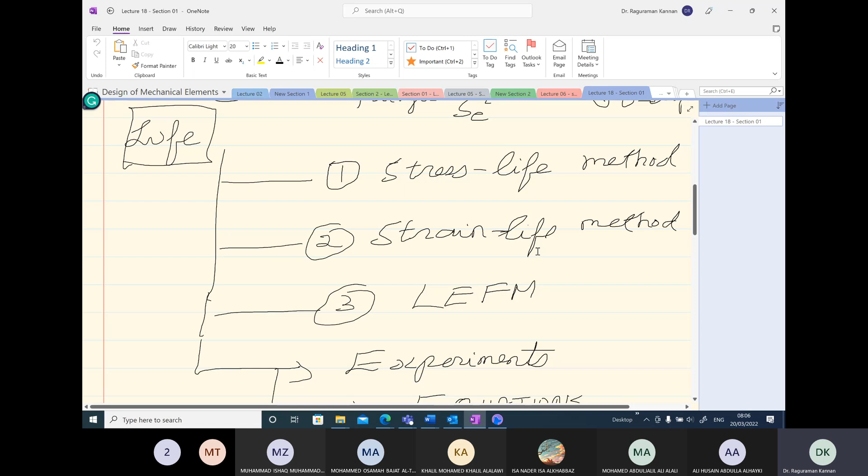So let's see here. We had 3 types of methods: stress life method, strain life method, and linear elastic fracture mechanics to predict the life of the part. We went through the experiments conducted for stress life method and strain life method, and we also saw equations, the empirical relationship between total strain, plastic strain, and elastic strain versus the number of cycles to failure. This was an empirical relationship obtained from experimental results. Now we will go through linear elastic fracture mechanics.

So this is lecture 19. And let's type it in here.

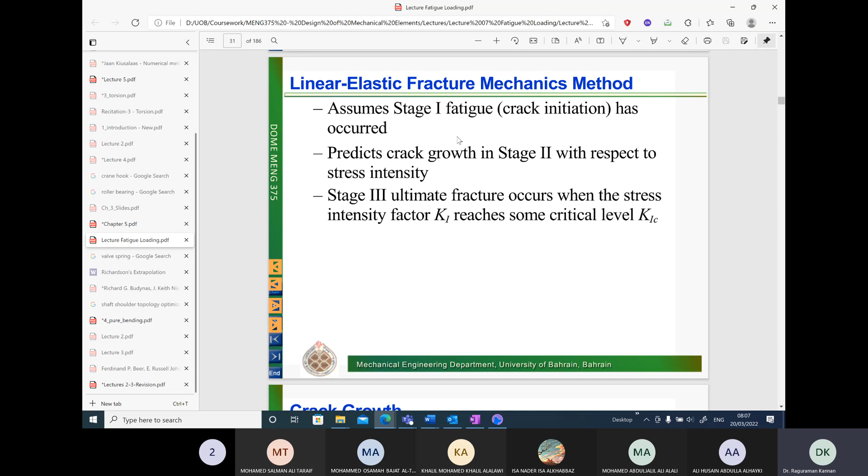So what are the equations we are going to use in linear elastic fracture mechanics for dynamic load? Again, we will use the same equation: Ki is equal to beta sigma root pi a. We are going to find the same stress intensity factor, but based on the maximum nominal stress and the minimum nominal stress, we get two Ki values, and then we take the difference between them. Just like we had the definition of sigma amplitude, we are going to calculate delta Ki in this case.

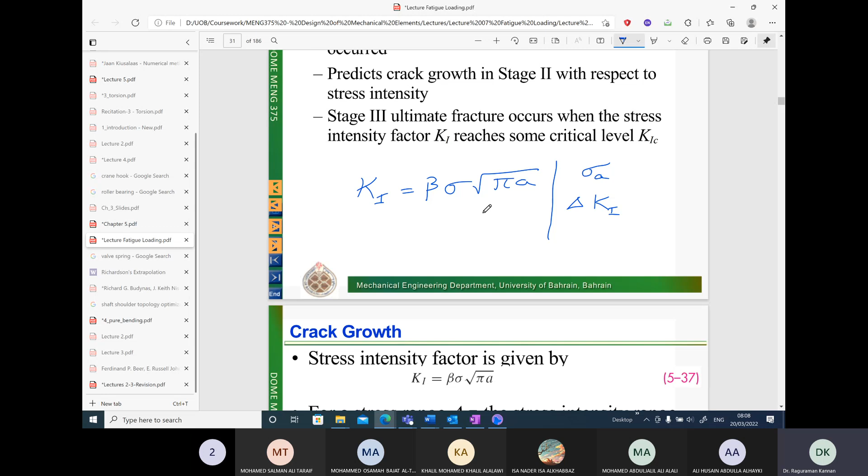Delta Ki will be the difference between the Ki values depending upon the sigma A value. So we assume stage 1 fatigue has occurred in linear elastic fracture mechanics, and this predicts crack growth in stage 2 with respect to stress intensity. In stage 2, the life of the specimen is found out. As long as stage 2 persists, life is there, and when it reaches stage 3, we have the ultimate fracture, brittle fracture to be more accurate, which is catastrophic. When Ki reaches KIC value, brittle fracture takes place. In the same way, we have to get a relationship.

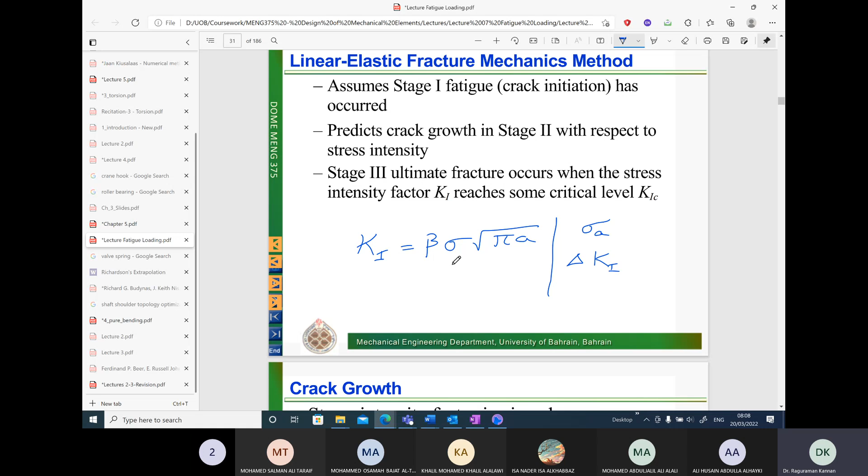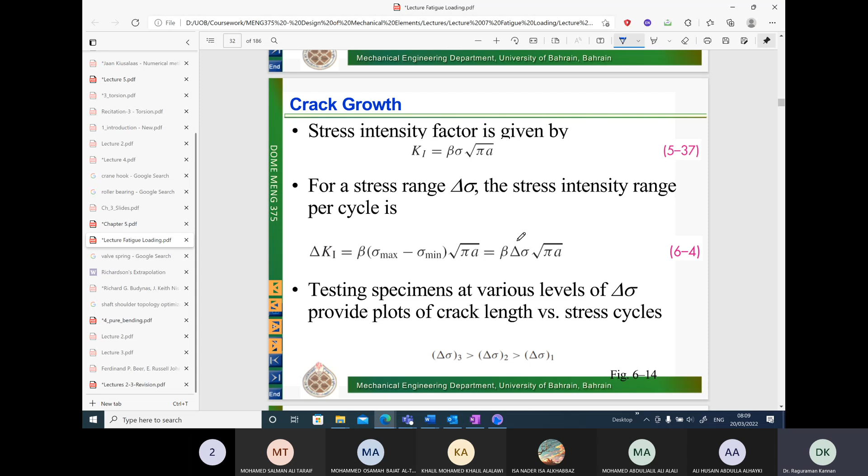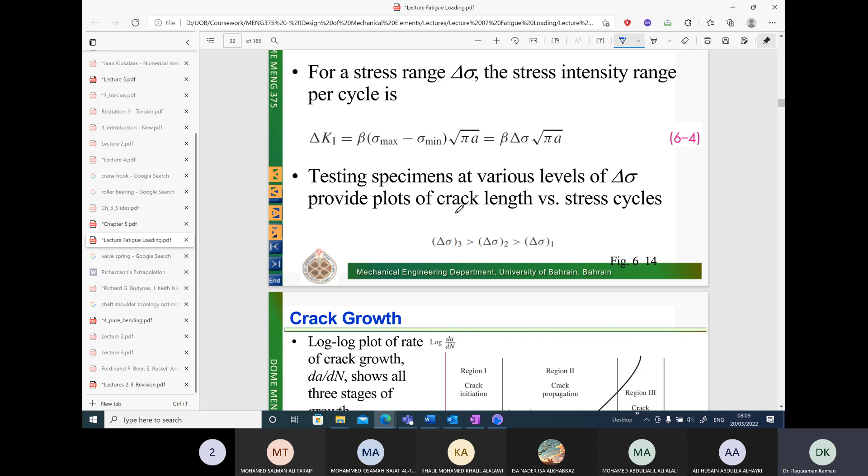So let's see the equations. The stress intensity factor is defined in this way. Using the sigma max and sigma minimum values, we obtain delta Ki. Testing specimens at various levels of delta sigma provides plots of crack length versus stress cycles. So what kind of experiment do we do? We again do experiments with a lot of specimens for various values of delta sigma. We calculate and perform the experiments, then obtain the data, providing a crack length versus stress cycles plot. Once we have this plot, this is a different plot again.

So we have this plot for various delta sigma values. Maybe on the y-axis we have crack length versus delta sigma.

From the log-log plot of rate of crack growth, dA over dN shows all three stages of growth. From this plot provided here, we will be able to extract more data.

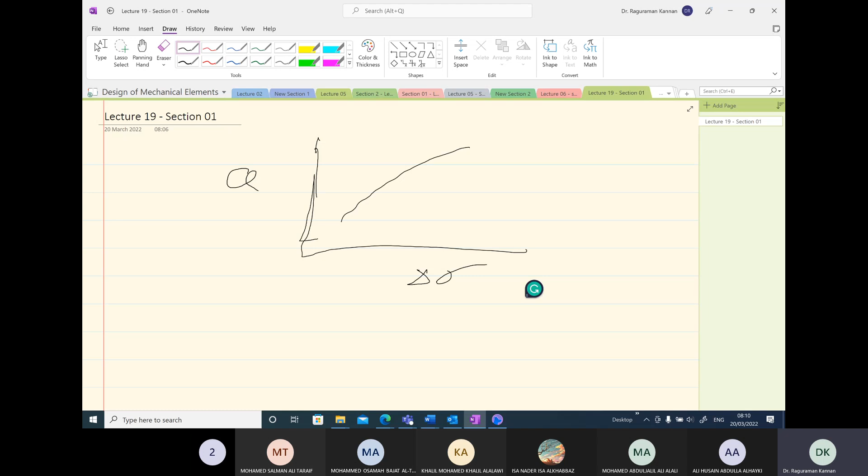So let's assume we have a curve like this, and in this plot we can, okay, let's see here, we have several plots. Maybe we will be able to obtain...

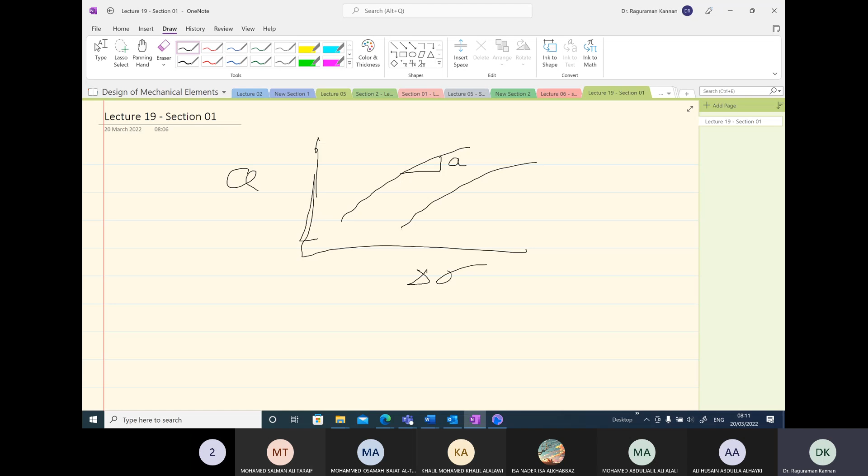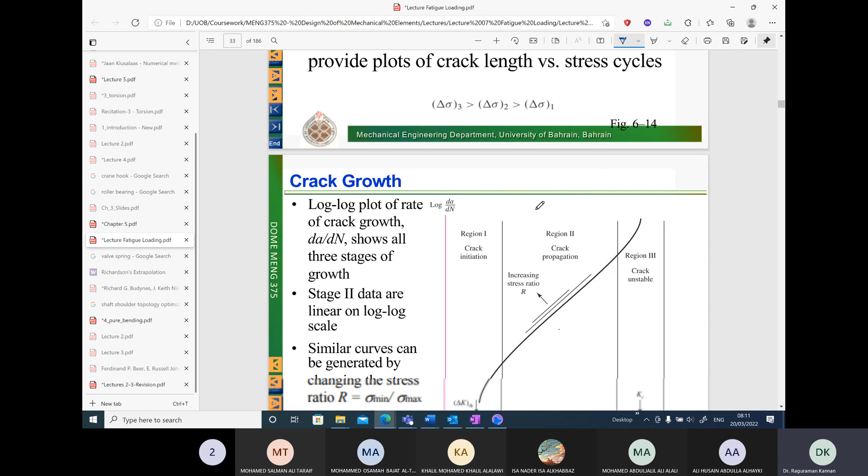What is the change in crack length for each delta sigma value. For each delta sigma value, we can obtain the change in crack length and how many cycles it took for failure. So finally, from this plot, we will be able to extract data between log delta K and log dA over dN. Somehow they extract this data and finally plot it here.

Now on the y-axis is the rate of growth of crack length with the number of cycles. On the x-axis, you have the delta K value, which is this particular value. Now what you observe here is there are three stages in which the crack grows.

Initially, the rate of growth of the crack is very high at region 1, and then it flattens out, becoming a constant rate of crack growth in stage 2, and finally we have again an exponential increase in the crack growth and then fracture. So the life of the specimen is decided between this range.

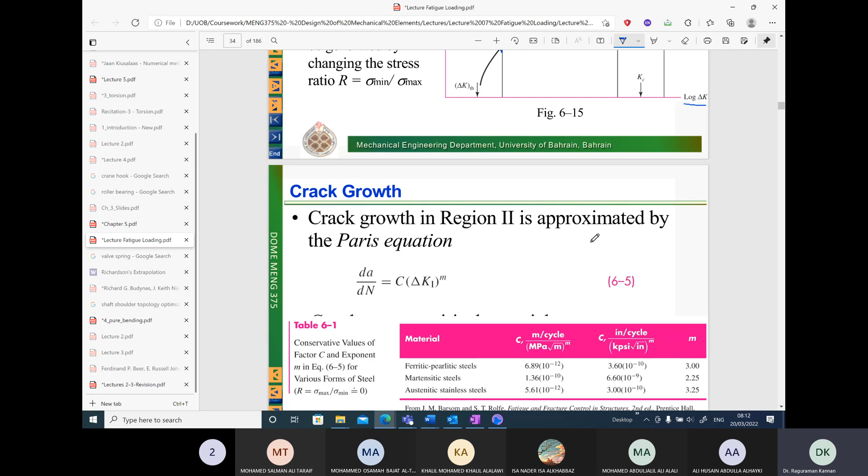Now based upon this graph, since this is a constant slope line, we can obtain an empirical relationship between dA over dN and delta K. Based upon the log plots, we get two constants: one is the exponent, one is the constant value, connecting the rate of growth of crack length to the delta K values. This gives you an equation called the Paris equation.

So finally, you will be using this particular equation for solving problems. How do I find the number of cycles to failure, or the life of the specimen, from this equation? By rewriting the equation and then integrating it.

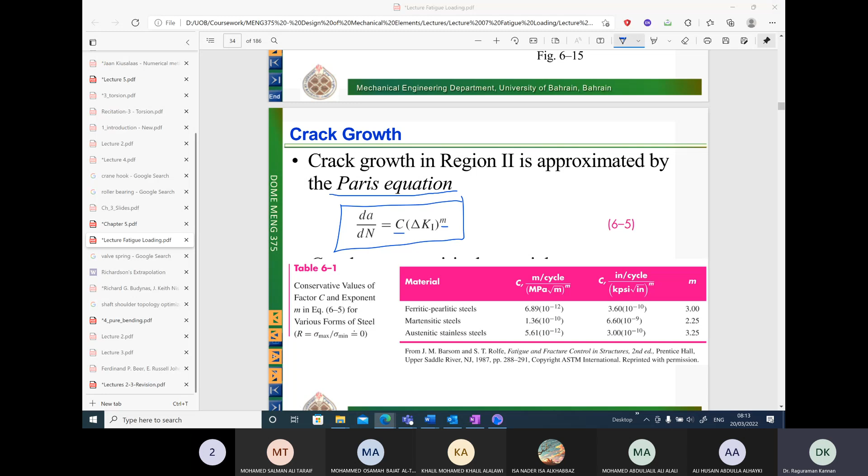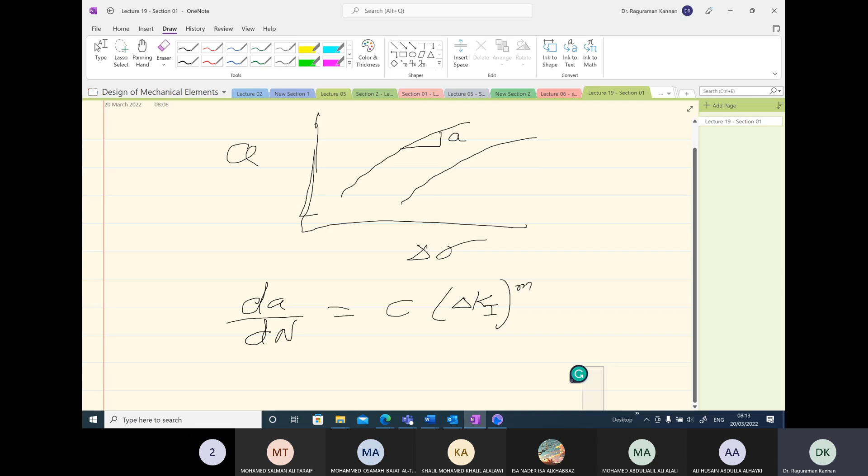So we can rewrite dA over dN as C times delta K to the power m. Take dN to one side and take all the other terms to the other side.

To the power m, and then integrating from 0 to the number of cycles to failure will give you the number of cycles to failure. Here will be the initial crack length, since we are integrating with respect to crack length, from initial crack length to final or critical crack length.

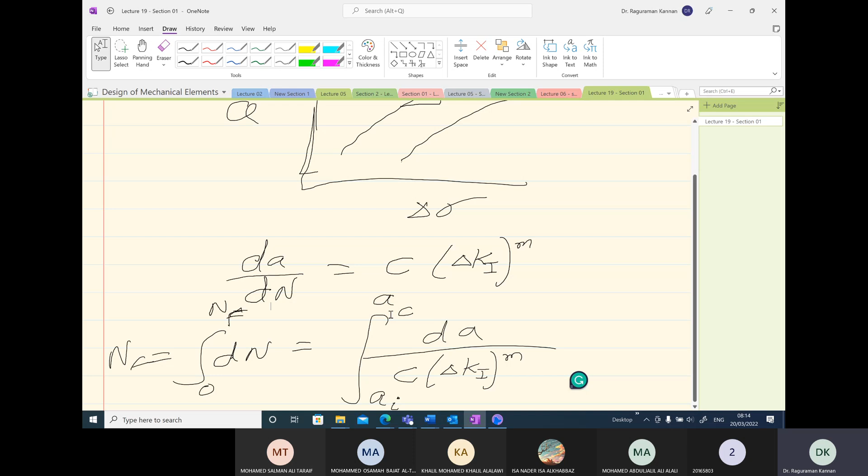If you know the critical crack length, then we can integrate up till the critical crack length, and the life of the specimen will be decided by that. Now the values of C and M are usually given in the problem.

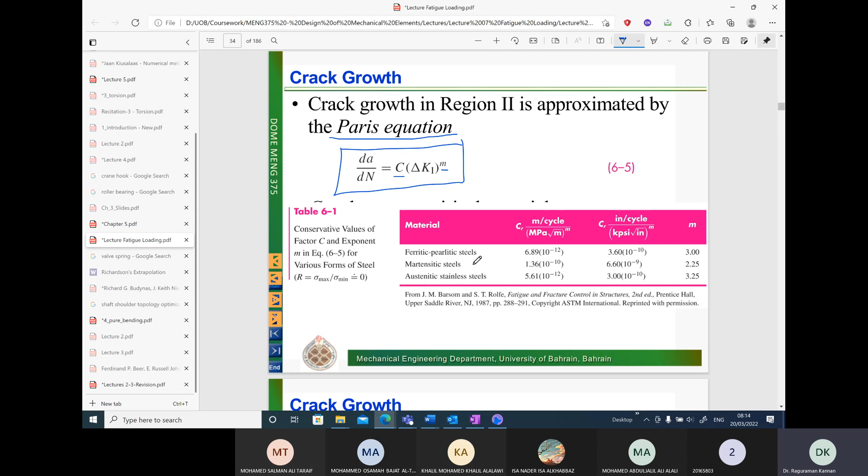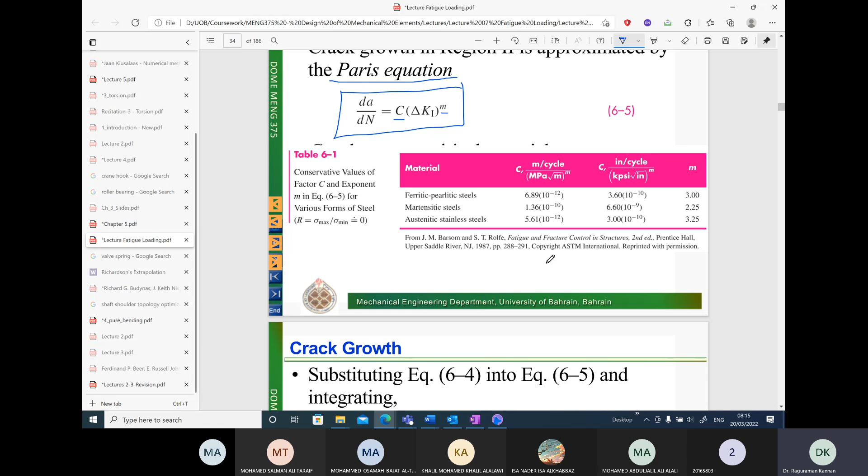C has these values for steels given here according to the empirical graph that was extracted, and M values are also given here, in both SI units and English units. So in your typical problem, these values will be given, and we will use this integral form of the equation to evaluate the number of cycles to failure.

Let's hold on a second until this opens so that we can calculate. We have 12 times 1200. We have a huge value. Let's see. So this is also in the denominator. Everything will go to the numerator, 8 times 12 times 1200.

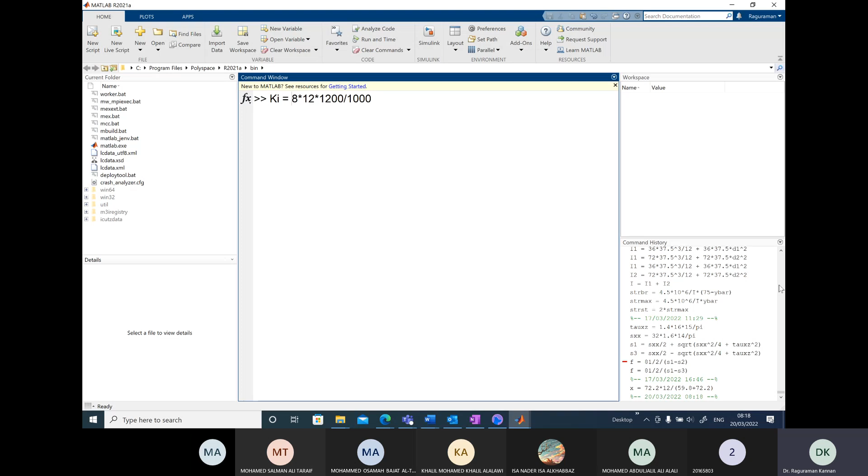Let's convert that into kpsi and therefore divide by 1000. Let's see, here we are calculating kpsi. Let's also see the properties are given in kpsi. Okay, so that's okay. The value 115.2 kpsi.

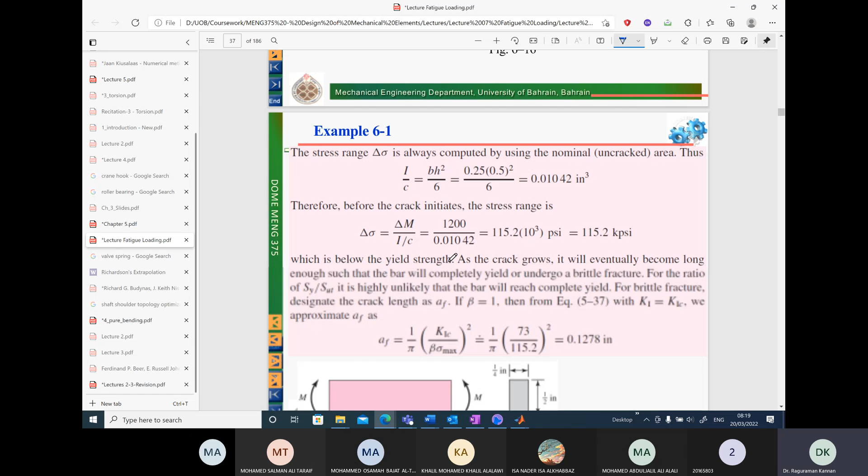Delta Ki is going to be beta. We will have delta sigma root pi. Okay, so let's just use the beta value they have used in the slide. Let's see here if they use a particular beta value. Initially, they are taking the beta value to be 1. And let's see here, we're using the KIC value. Okay, so before that.

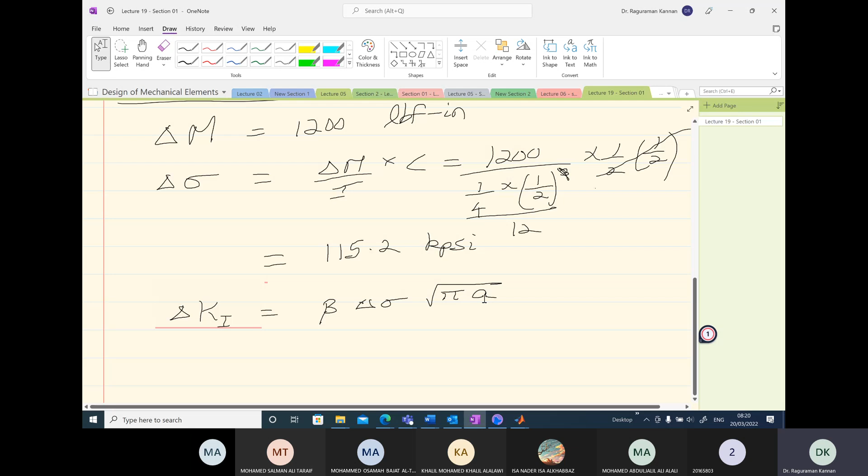So this is the delta Ki value we are supposed to calculate, but what is the A value to be used? So first, the question, if you read the question, let's go back to the question, what you are asked to calculate, estimate the number of cycles to failure, which means I need to use a particular formula for number of cycles to failure.

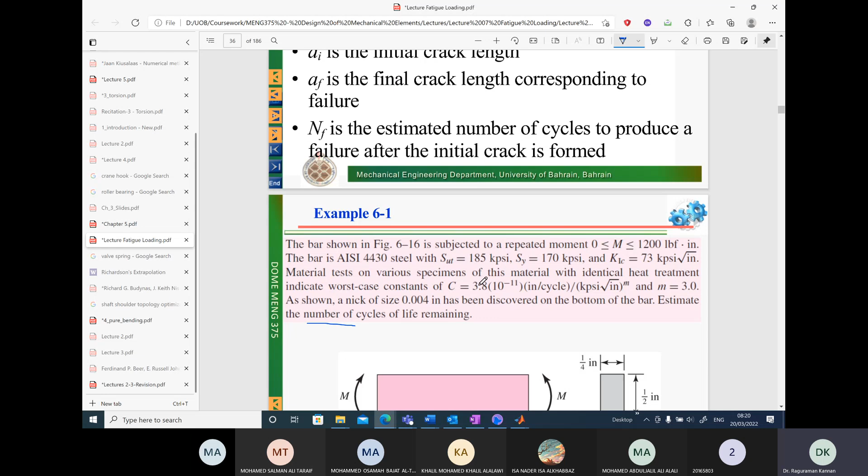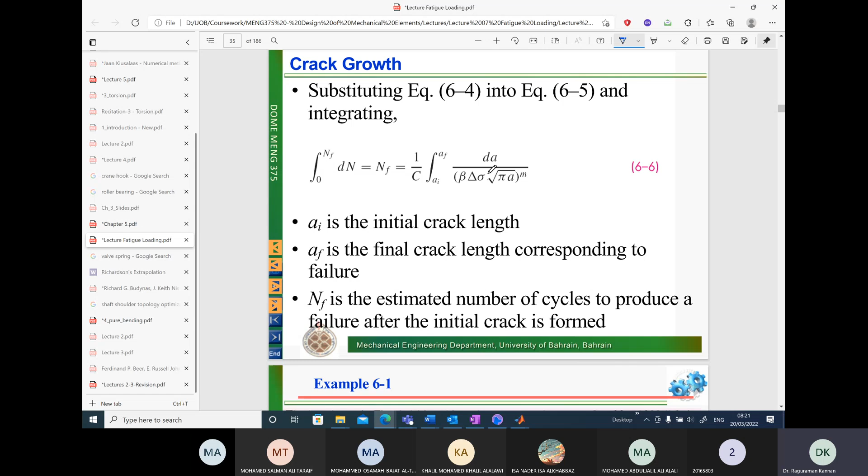A initial to A final, and then have the formula here. After substituting all the constants, we have 1 over C outside. Again, what they have done is they have substituted for delta Ki. 1 over C is a constant, so we can take it outside and rewrite the equation, dA over beta delta sigma root pi A raised to the power m.

Okay. We calculated delta sigma here. Now, if you see pi A, root pi A is inside the integral, and we are integrating with respect to A. So we need to find AI and AF. AI value is already given in the problem. The initial length is given to be 0.004 inches.

So I can put the value here, but we do not know what is the AF value, final crack length. So how do I find the critical crack length or the final crack length? We can say critical can be found when your Ki is equal to KIC value. Now recall that your maximum is also equal to 1200, so sigma max should also be equal to 115.2.

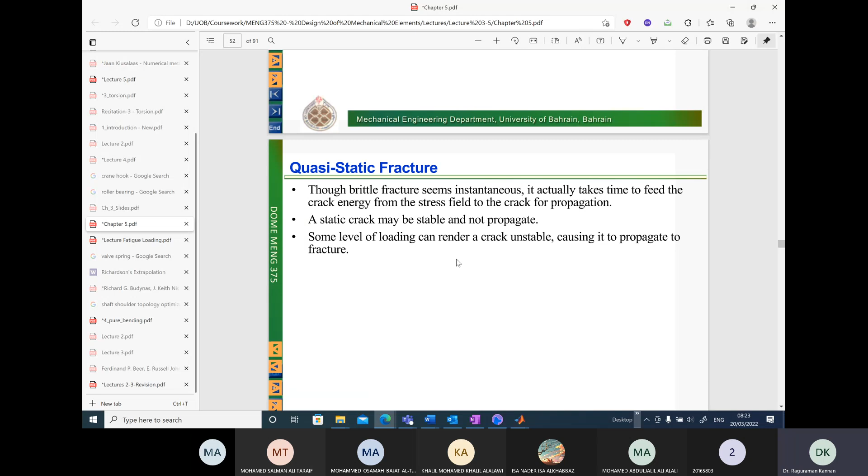So for this critical length, let's assume initially beta equal to 1, because we do not know what is the critical crack length, and we will not be able to figure out beta easily. Again, for beta, if you recall, we have to go to the previous chapter, and let's see here.

Assume beta equal to 1. Go here, Ki will be beta times sigma critical, 115.2, or the, so why did we assume sigma max is equal to sigma critical?

If you think about it, we want at the maximum stress, what would be the critical crack length? Okay, so that we can calculate this number of cycles to failure. The final crack length should also be equal to critical crack length. Up till critical crack length, we want to find number of cycles to failure. So at max stress, we most probably we want to calculate what is the critical length when it reaches that point.

Okay, so that at that point Ki with the sigma max value should be equal to KIC. So Ki is equal to, again recall, Ki is equal to beta times sigma root pi A. We are going to use the same formula here. Beta equal to 1, root pi times A critical should be equal to KIC value. What is the KIC value? It's given in the problem, 73 kpsi root inch, 73.

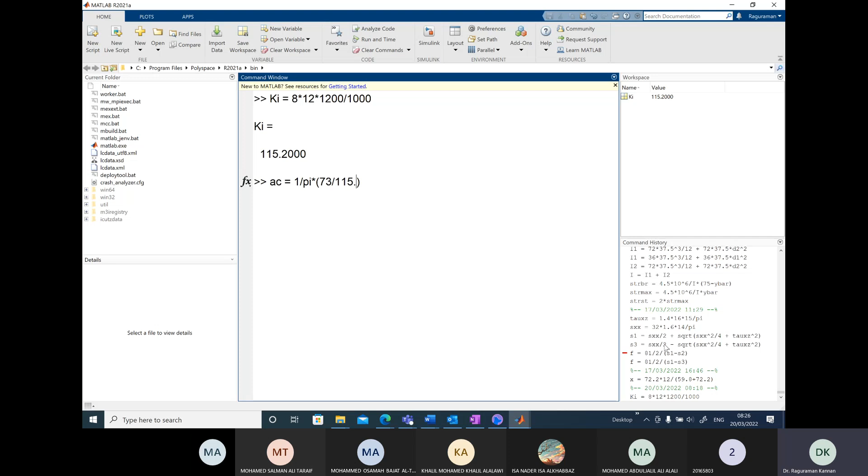So let's calculate 1 over pi times 73, 115.2, square this guy. Okay, so this is in kpsi, so everything works out. Let's see here. Okay, and we should get the result in inches. So AC is equal to 0.1278 inches.

So this is the point, up till this point we will integrate it and get the results here. Okay, so but before we do that, now we have a certain critical length, 0.1278 inches. Let's go back to the slides and see. Probably we can, for this critical length, extract the properties of beta. So for 0.1278, let's go back here.

We get the ratio first, A over B ratio. What is the B? B is the width. For our case, what is the width of the plate? 1/2 inch. By 0.5.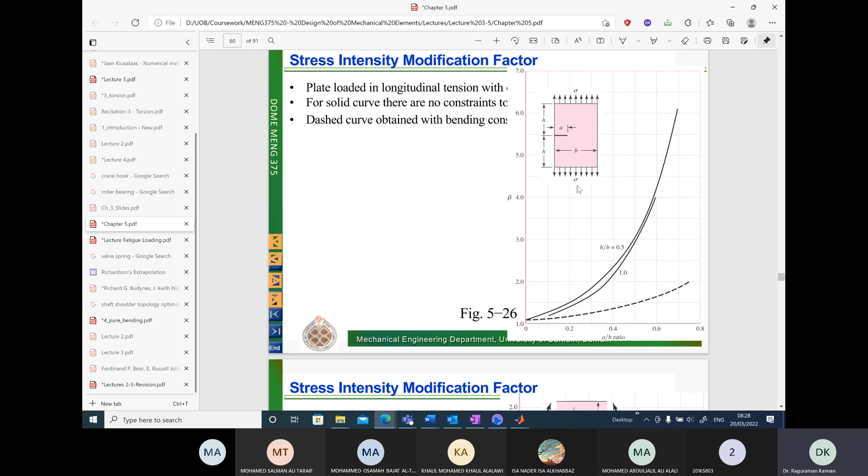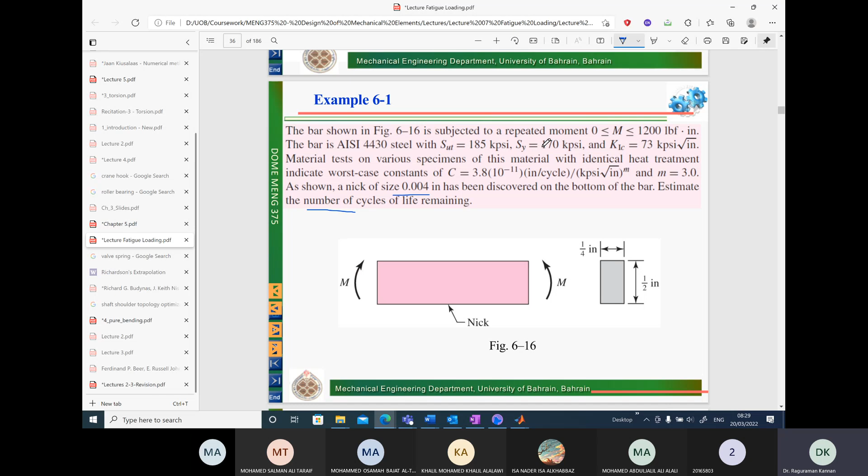We also need H over B, is half the length. Let's see here. We need the total length here, length of the specimen. Are we given any length? We are not given the length of the specimen. Let's see here.

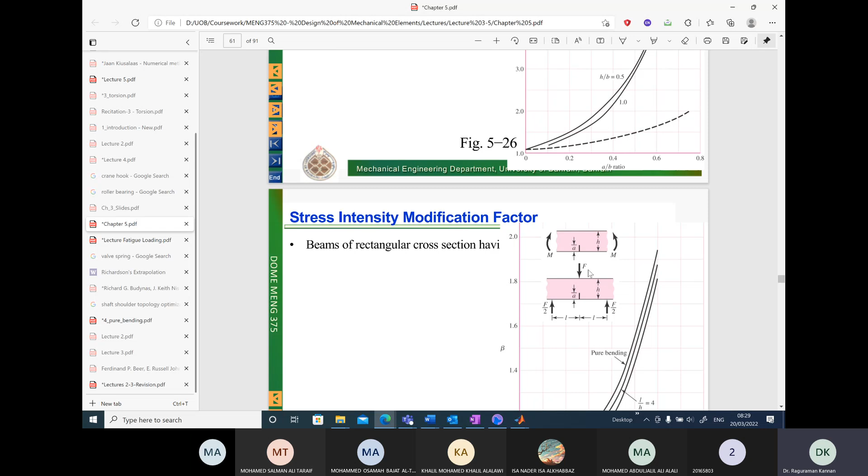And also this is a bending moment load. Are we in the right graph? No, we are not in this graph. This is the graph we have to use. Yes, so this is a pure bending moment load. This is the graph we should use, A over H, and pure bending.

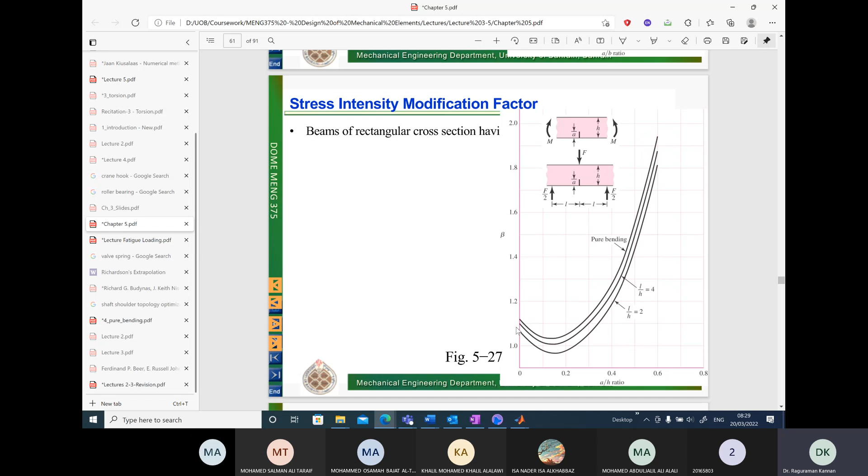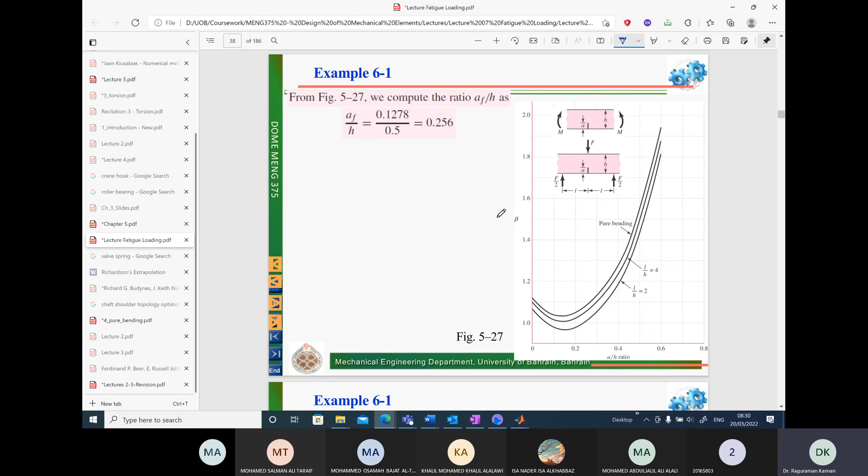This is the curve. So 0.2556 is halfway in between, and let's see, the value would be approximately here near 1.1. Let's see what they have assumed, a value of 1.1. That's what we get from the graph. 1.07. So they have assumed 1.07. We can assume the same value. Beta is equal to 1.07. And that's

based upon this value. Again, let's calculate the critical crack length using the same formula. So remember, there is a beta factor here which is equal to 1 initially. So this beta will be going inside here, this part over here. So we need to calculate the critical length again based upon this.

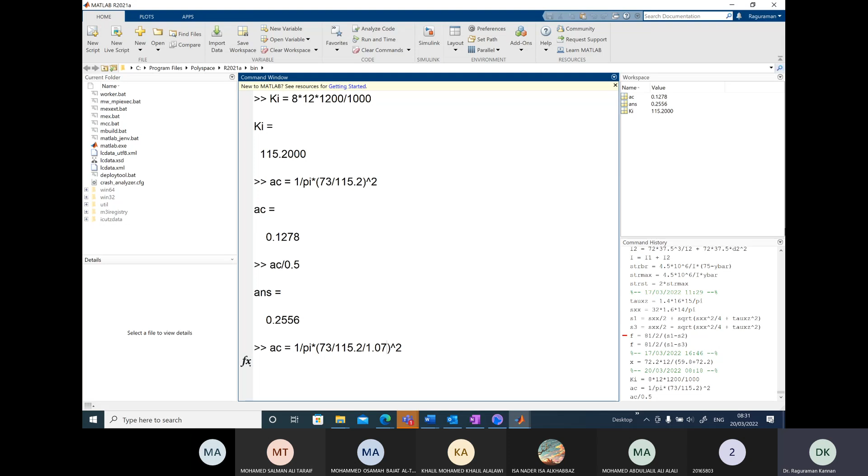Beta value 1 over pi, and 73 over beta 1.07, to 115.2. Okay, so what is the critical length now we get? Let's go here to MATLAB. Here we have to use 1.07 again. Okay. Get 0.1116. Critical length is

Okay, so this is the critical length I will be using again. Remember that I have calculated the critical length twice depending upon the beta values. Okay.

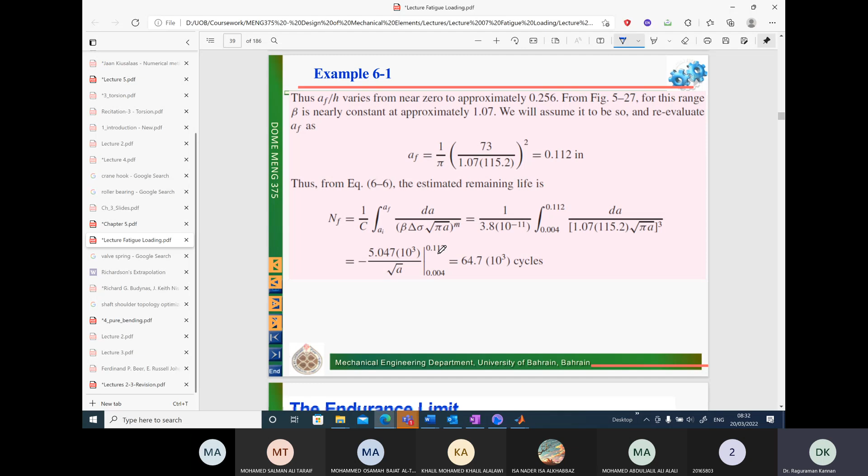Okay, so now let's use the integral. The integral is 1 over c. We need all the values. N f is equal to 1 over c. What is the c value? Go back to the problem. And here. The capital C value is 3.8 into 10 power minus 11.

The integral within the limits. The initial crack size is 0.004. And the AC is 0.1116. Use that value.

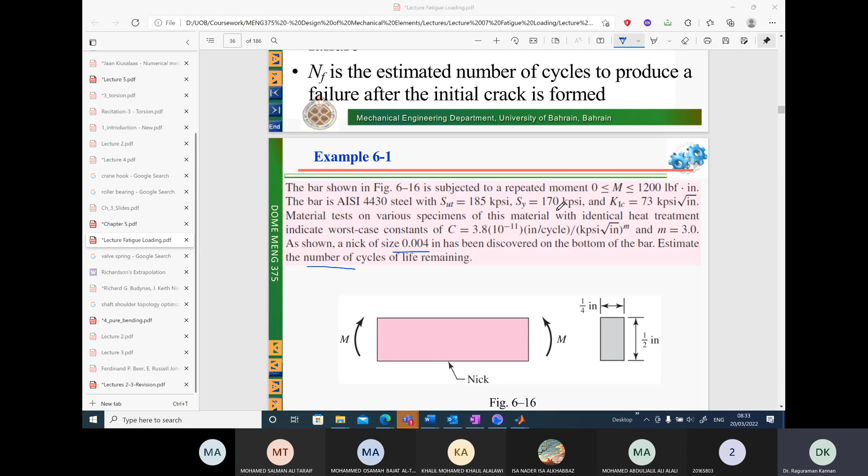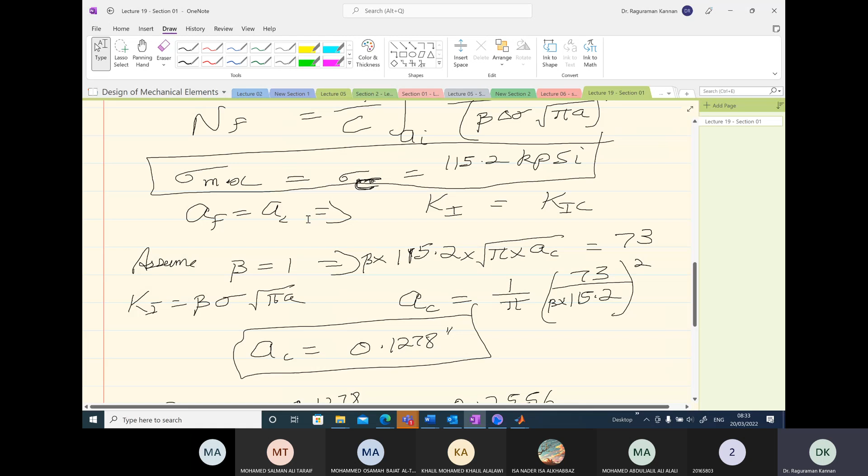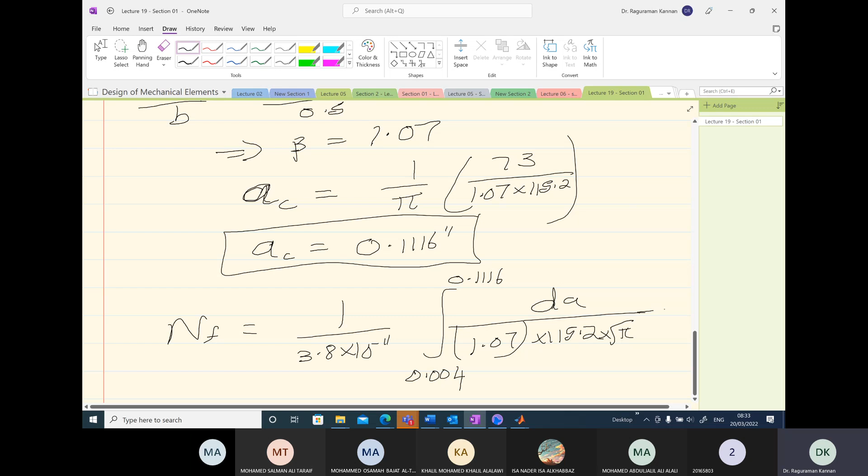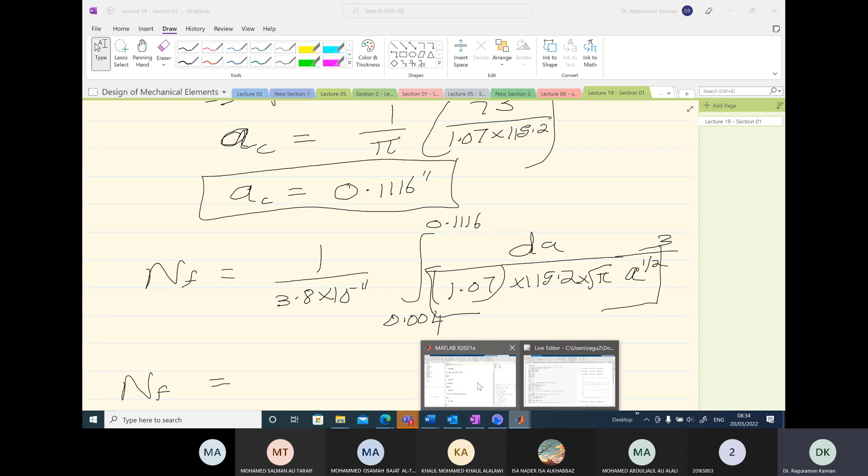Cube. Okay, so the cube value, and we can take all the constants outside and rewrite it. So let's simplify the constant part. Let's see. And this we're going to write as constant because I want to calculate this part, 1 by, so 10 power 11. We have 10 power minus 11. We can take it to the numerator. Divided by 3.8. Multiply that. And we have this quantity cube. So let's open this bracket and write it as cube.

1.07. Then 115.2. Multiply that by root pi. So pi raised to the power, we can write it as square root with a bracket. Anything else? No, that's it.

So these are the constants, and we have raised it to the power 3. And we get 2.5234. Multiplied by 10 power 3.

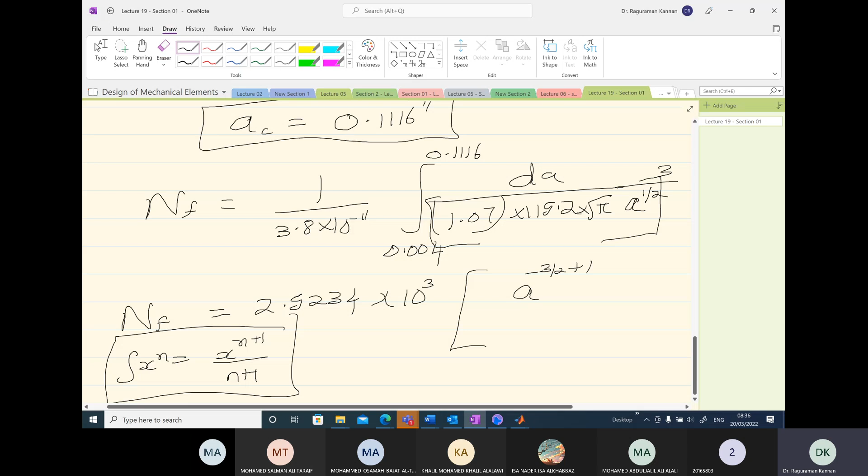Here inside the integral, we have a power 3 over 2 in the denominator. So if you integrate it, what is the integral x power n? X power n plus 1 over n plus 1. So this is the relationship we are going to use. A power minus 3 over 2. So integrate it, you will get a power minus 3 over 2 plus 1, in the denominator, minus 3 over 2 plus 1, within the limits 0.004, and then we have

0.1116. Okay. So what is the number of cycles to failure? Here we have minus 3 over 2 will give me, plus 1 will give me minus 1 over 2. And again we have a negative sign, minus 1 over 2.

Okay, I can use the negative sign and reverse the limits here. 0.004, reverse the limits. So in the denominator here, I have 1 minus 3 over 2 will give me minus 1 over 2, and the 2 will go to the denominator. Negative sign we have reversed already, so 2 times here.

What we will have here is a power of minus 1 over 2. In other words, we can simply write it as 2 over square root of a.

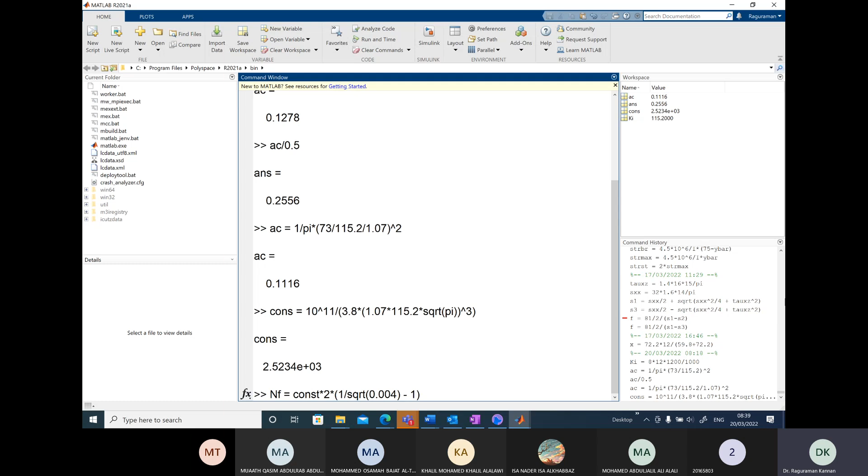So if you calculate f based upon the constant, multiplied by 2, multiplied by bracket open — 2 we can take it outside, 1 over root a, so 1 over 0.004 minus, it should be square root because it is root a, minus we have the critical length, 1 over square root of critical length, which is AC.

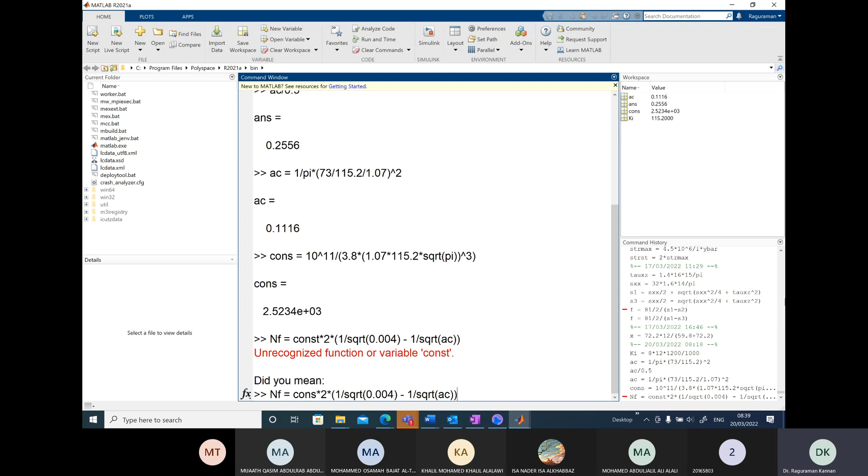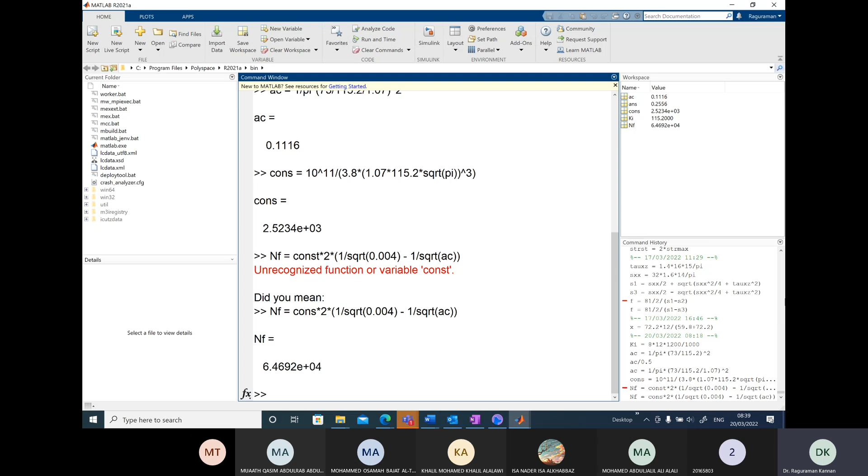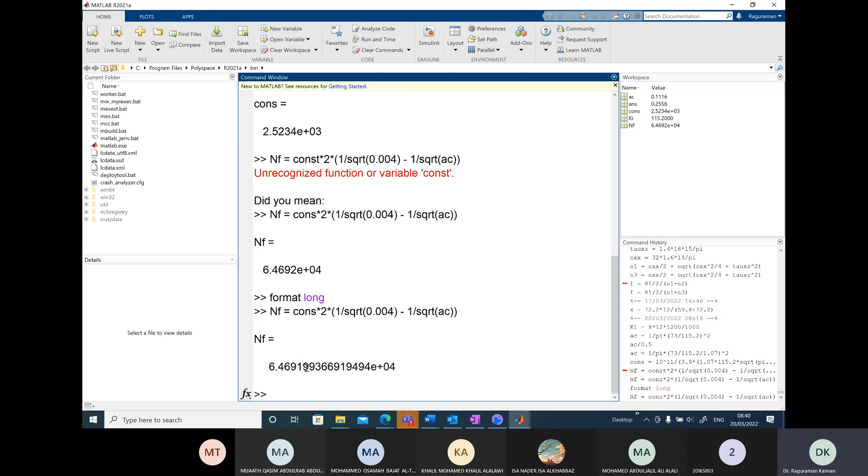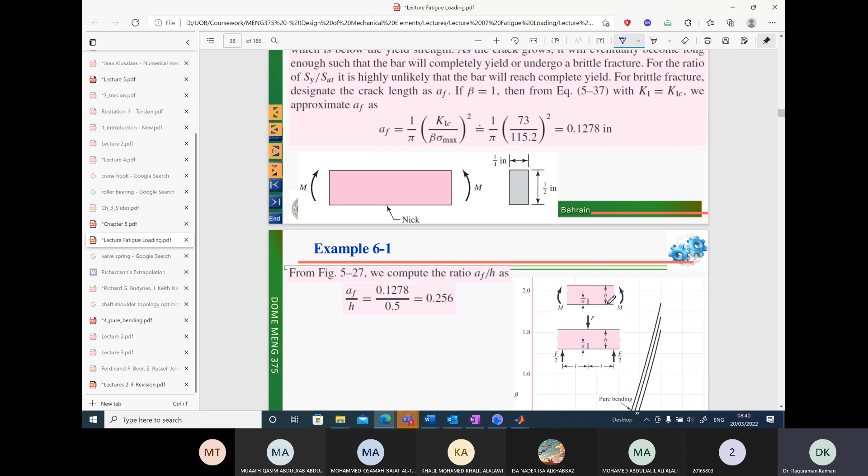So let's see what is the value they have calculated. Similar, 64.7 — so thousands, around 65,000 cycles. Okay, so this is how we find the life of the specimen based upon the linear elastic fracture mechanics calculations.

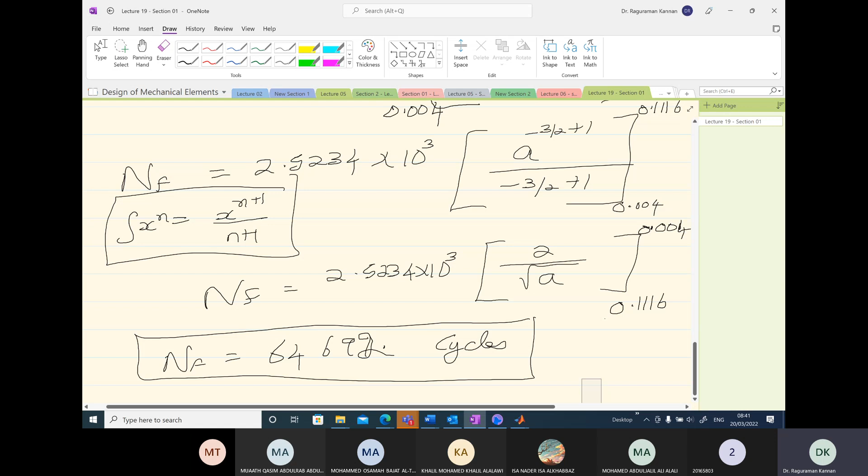Now recall that we have not gone through what equations we must use in stress life method. In stress life method, we saw only one experimental result, and that experimental result is the SN diagram or the Wöhler curve.

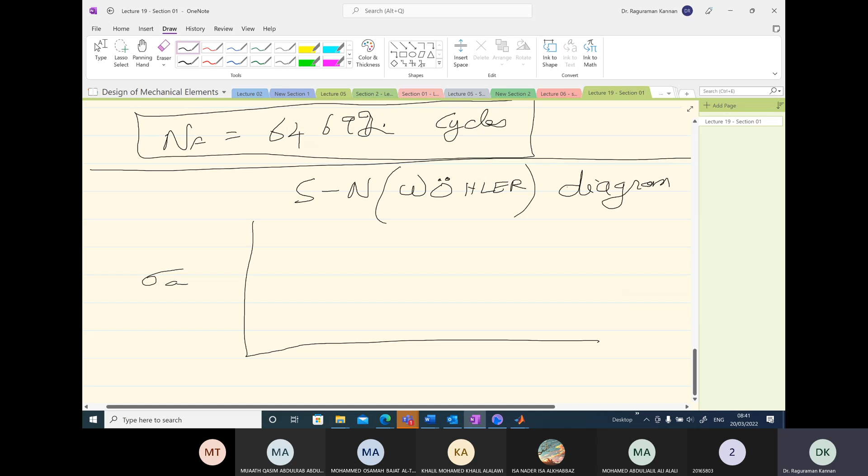Again, SN or Wöhler curve, named after the guy, diagram or curve, whatever you want to call it. In the SN diagram for steels and other BCC specimens, we saw on the y-axis we plot sigma amplitude we apply on the specimen, and on the x-axis we have number of cycles to failure. And then for BCC specimen, there is a flattening out of the curve, and because experimentally we have proved there is an endurance limit, Se value — this is the property we are going to use for BCC materials.

For FCC materials like aluminum, we saw that we do not have an endurance limit. At least experimentally, we can show that endurance limit doesn't exist. On the other hand, what we have is a fatigue limit at 10 power 7 cycles, or 10 power 8 cycles, or 1 million cycles, whatever it is. And then we use that value.

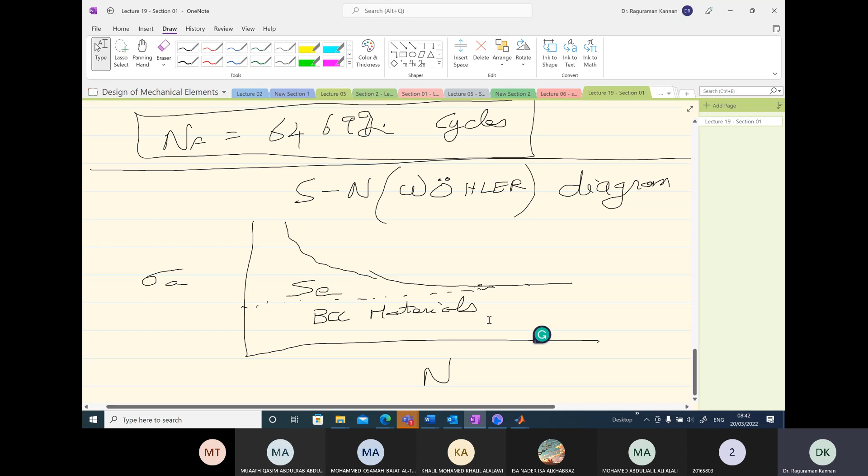Again, it is important to understand the difference between endurance limit or fatigue limit. It is also called fatigue limit, and fatigue strength of the aluminum. Fatigue strength is for FCC like aluminum, and endurance is for BCC like steel. For example, steel has BCC structure.

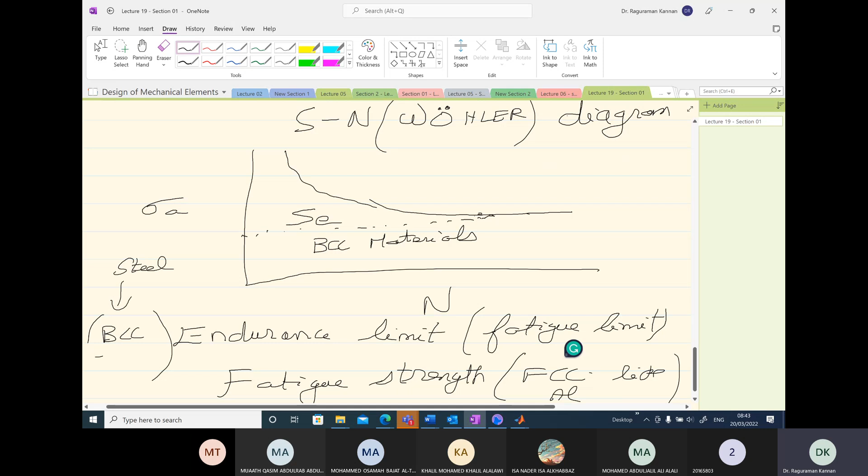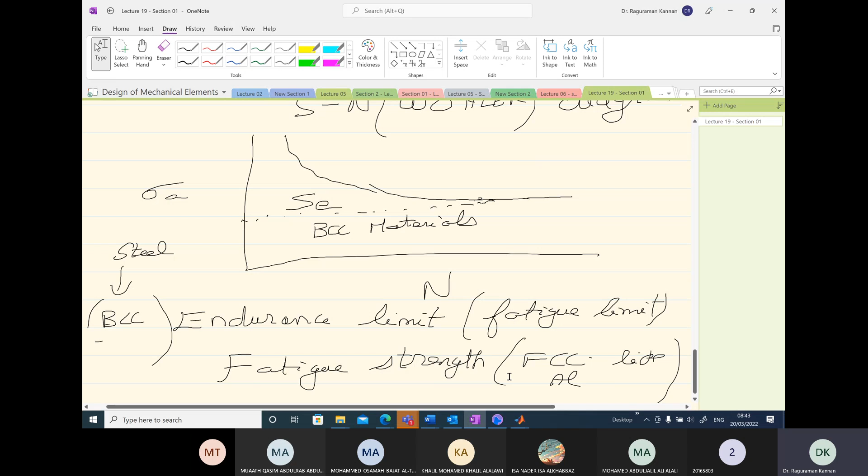Endurance limit is the limit below which the material will have infinite life. On the other hand, fatigue strength does not have any property like that. Below fatigue strength, again, you will have only finite life. There is no infinite life for FCC materials like aluminum.

So clearly you can see the advantage of using steel versus materials like aluminum. Aluminum is lightweight, but again it has finite life below the fatigue strength value. However, with steel, if you design your component such that your stress lies below the endurance limit, then the component will have infinite life even under fatigue loads. But the disadvantage is you have very high density.

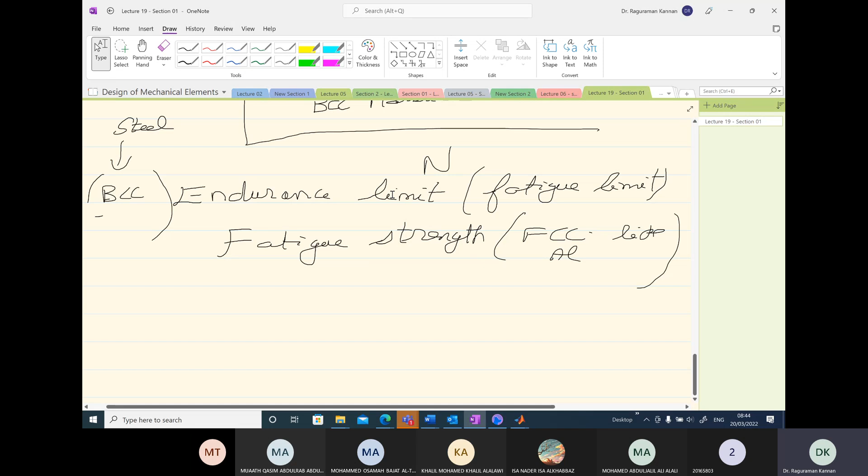Again, there is no theory behind why endurance limit exists for BCC materials and why it doesn't exist for FCC materials. There is no clear understanding here, and this is a potential research area. Fatigue modeling is quite complicated, and we do not have proper theories. You can say the so-called theories are based upon experimental observation, and it is more an empirical formula rather than a theory.

All right, so we have about 5 minutes. I will introduce the stress life method here. Before we begin the stress life method, we have to see some of the properties of materials we will be using here.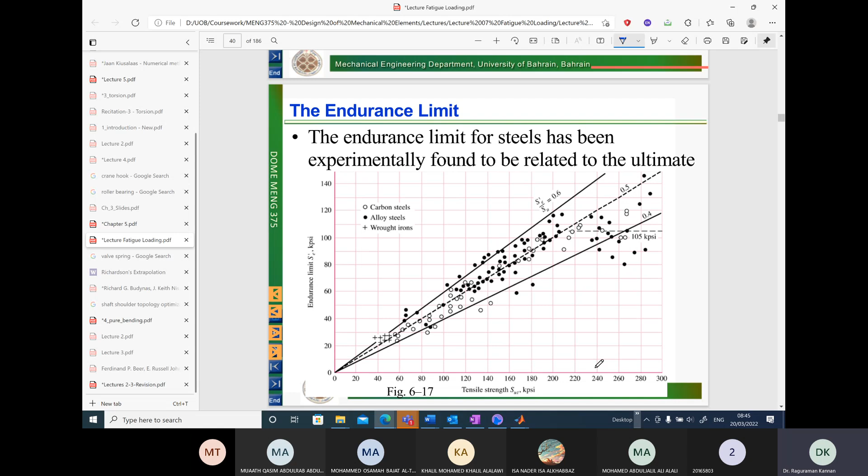There is a linear relationship between these two values up till a certain point, and after that it flattens out. There is no increase in the endurance limit, even though the ultimate strength of the material increases. This is a very important property you need to realize. You can increase the ultimate tensile strength of the material by doing any kind of material processing, but the endurance limit of the specimen still reaches a maximum value and flattens out for steel. This is a general experimental observation.

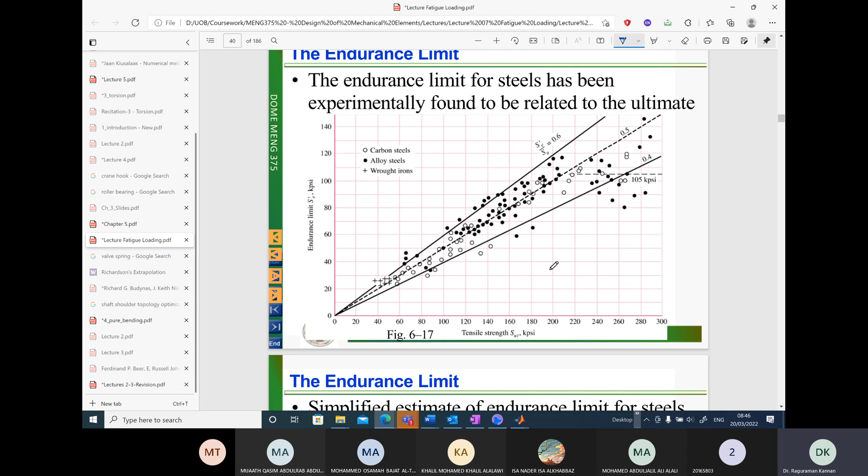So as per this graph, we can get an empirical relationship between the experimental values of endurance limit and the ultimate tensile strength of the material. In your design, you will often use this empirical relationship to predict the endurance limit of the material based upon the ultimate tensile strength of steel in particular. Do not use this empirical relationship for any other material except steel.

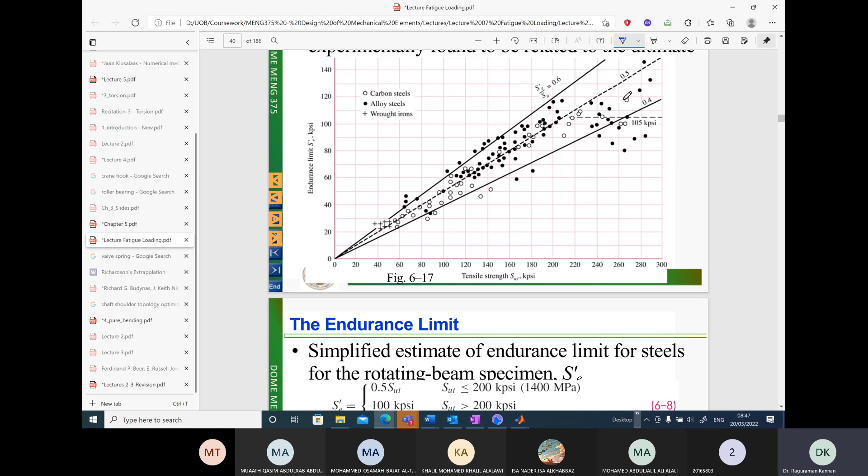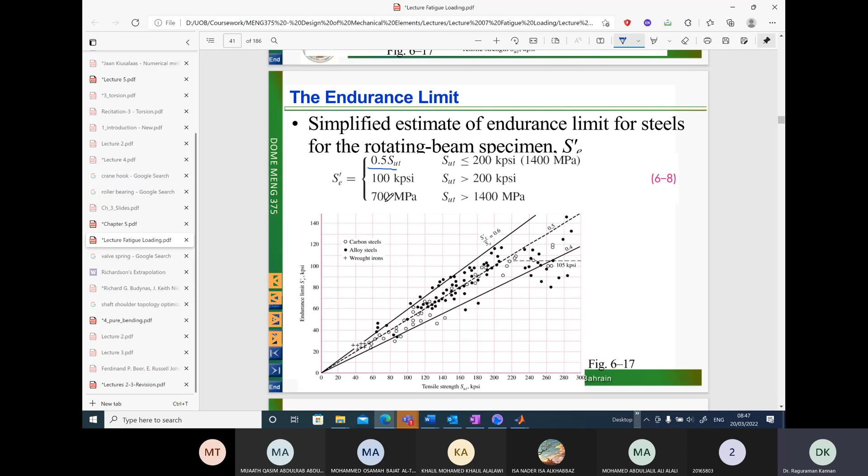0.5 times SUT is the value from 0 to, as shown in the graph, any value between 0 to 1400 megapascals, you will use the relationship 0.5 times SUT for predicting the SE endurance limit of steel. So if your SUT value lies between 0 to 1400 megapascals, this is the relationship you will use to get the SE value. On the other hand, if your SUT value is greater than 1400 megapascals, you will simply take the endurance limit as 700 megapascals for steels. This is the very first important property, and you should know how to get or predict these values from SUT values.

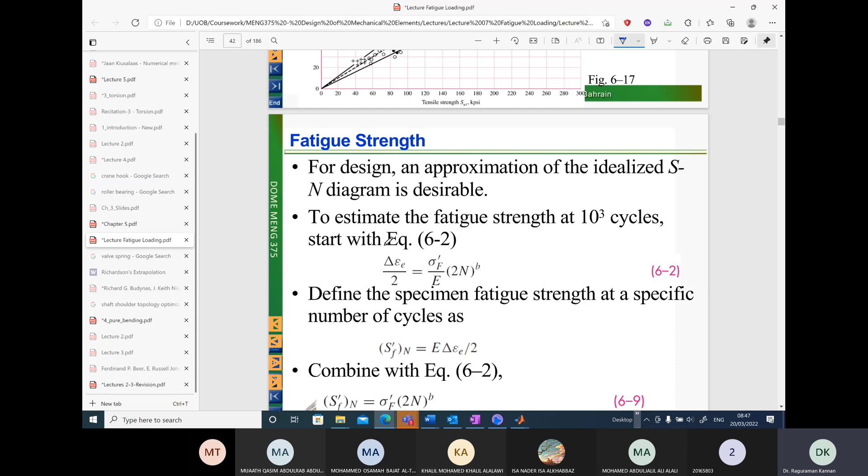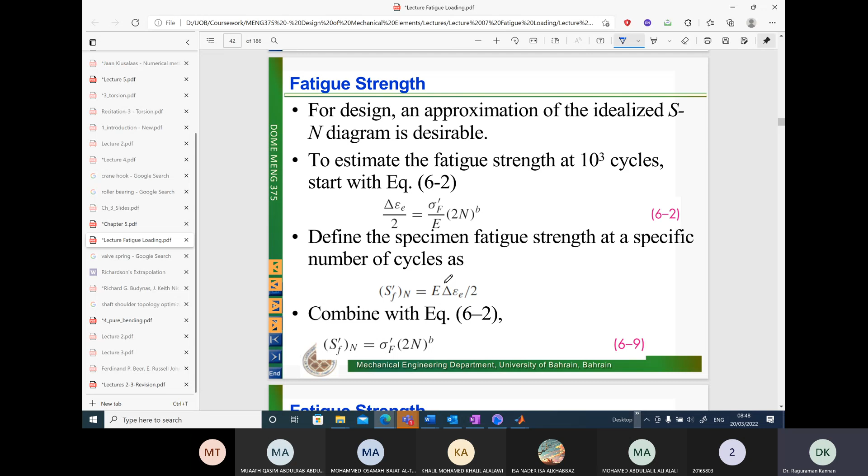Let's skip here for a moment. If you recall the Coffin-Manson relationship from the strain life method, we are going to use a very similar type of equation in the SN diagram. I will briefly explain it and then we can discuss the equations next class.

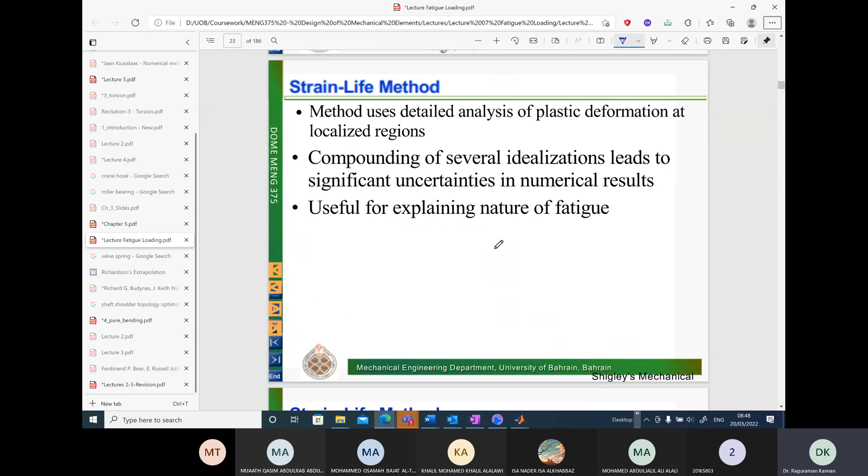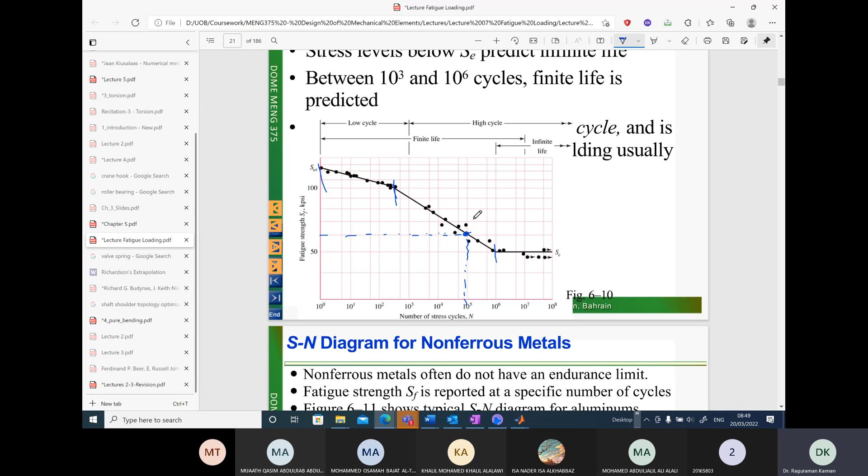Let's assume this is the value of sigma A. We can draw a horizontal line to the intersection point, then a vertical line, and we will be able to figure out the life. To do this, we need the equation of this line between 10 power 3 cycles and 10 power 6 cycles, so we need a curve fit for this line. Usually a curve fit is done between this limit and also between 1 cycle and 10 power 3 cycles. We will come up with these equations similar to your strain versus number of cycles to failure graph, in the same way.

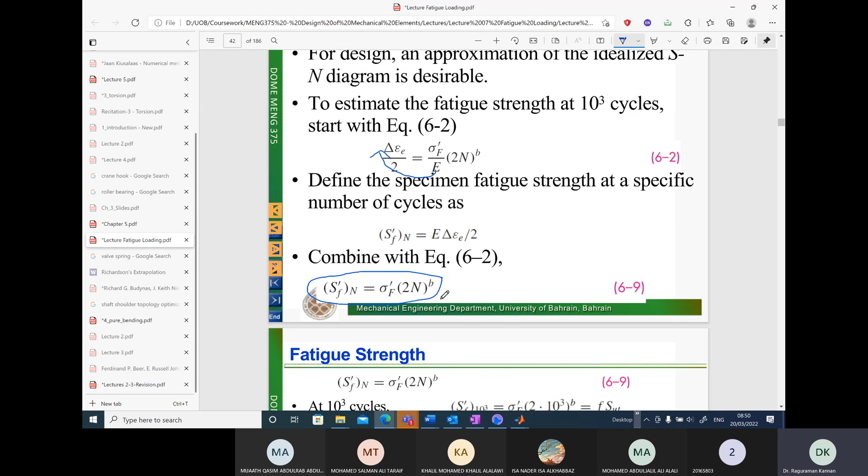Let's go back to the slide. In the same way, we also obtain the relationship between the elastic strain and the curve. Basically, instead of strain, we have to replace this by stress. Using Hooke's law, we can replace this by stress, which we get by multiplying by the E value. Take the E value, multiply it to the left hand side, and you will directly get the stress. So after combining this, the final equation we get between stress and number of cycles to failure is this equation, and we are going to use it to predict the number of cycles to failure. Here we have some constants, and we need to know how to get the values of these constants, B, F, etc.

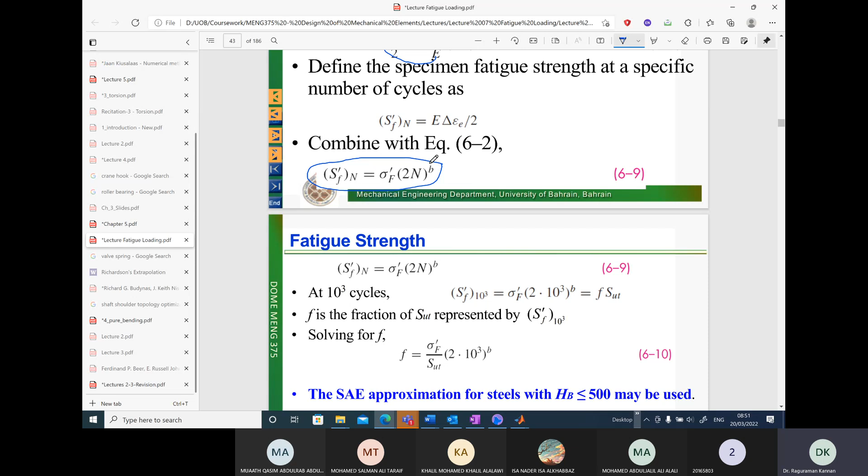Next class, I'm going to derive some equations to get the values. You will not be asked to derive any equations yourselves. We will use the final form of the curve fit to obtain the number of cycles to failure for a completely reversed loading.